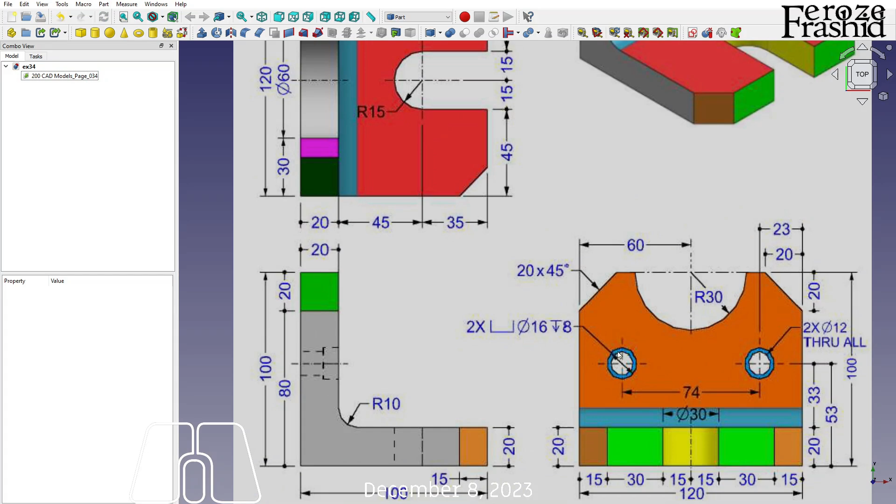Exercise 34 is a comparatively easier problem. The only trick I see is that these two holes are counter bore, and that's the only trick. Other than that, it looks like a pretty straightforward job. So I'm going to relocate it to its position, one of the corners, and then we'll get started.

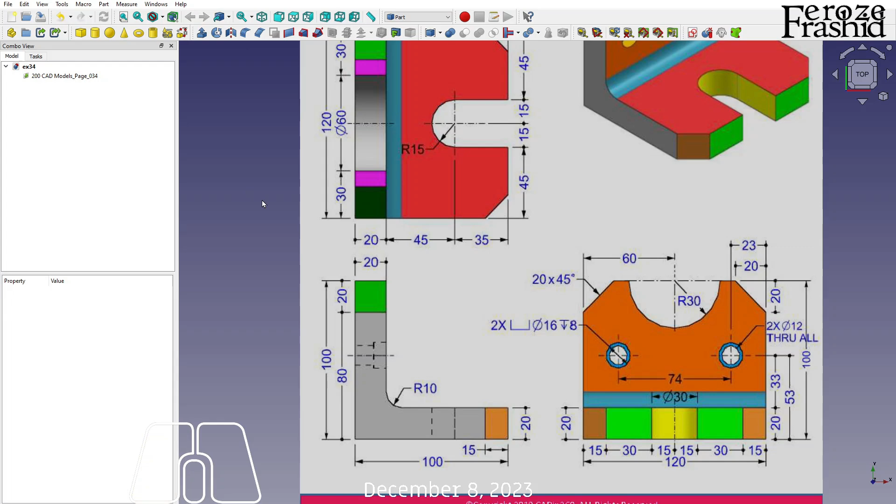That's about it. I want to start with the front section, front view, which would be on XZ plane. The XZ, to my mind, is always the front view. So let me go ahead and place this on XZ plane and start sketching there. The image was on XZ plane, we started sketching on XZ plane, so it showed up here.

Now I want to draw the outline, including the fillet here. That way I'm not worried. Okay, here's the trick: I'm using the polyline, and as soon as I finish drawing an arc, the next line becomes tangential, which is okay for now. Just remember we'll have to go back and fix that. If it wasn't a polyline, it would be horizontal anyway, so let's fix that before we forget it.

Now this is 10 radius. I'm going to go ahead and place that. These two thicknesses are equal to 20, right? These two are equal to 100.

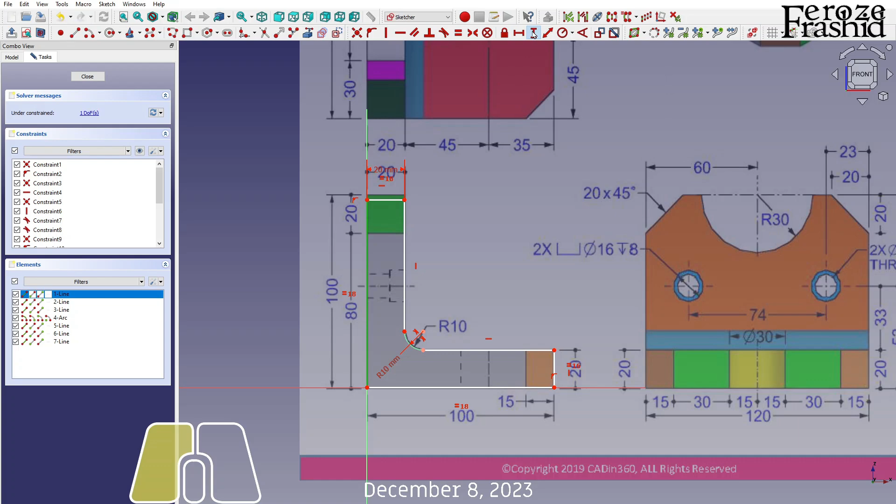Doesn't seem like 100. Did I calibrate? Oh, now hold on, the bottom side is 100, the top side also says 100. I bet the image's aspect ratio was lost when the plane was being built, so we'll take that as okay.

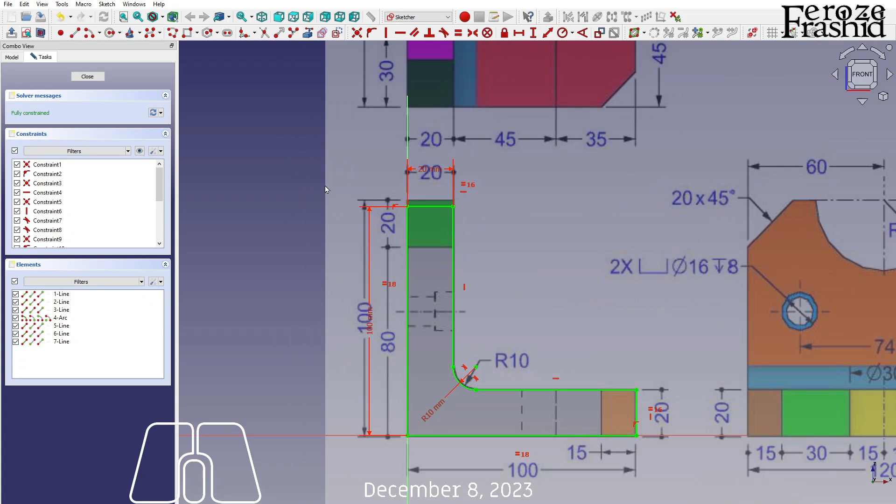Alright, so that's our XZ plane, the sketch is drawn. Let me go ahead and rename that as sketch. I'm going to say angle bracket.

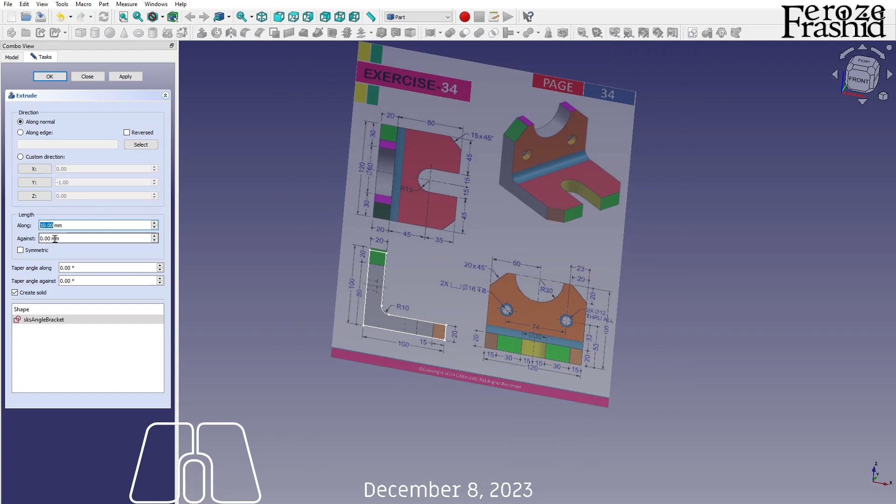Okay, I want to extrude that for 120 millimeters, but I want to keep it symmetric. Now, because I did that symmetric, whenever I'm working on these two empty cutouts, it will be on the XZ plane.

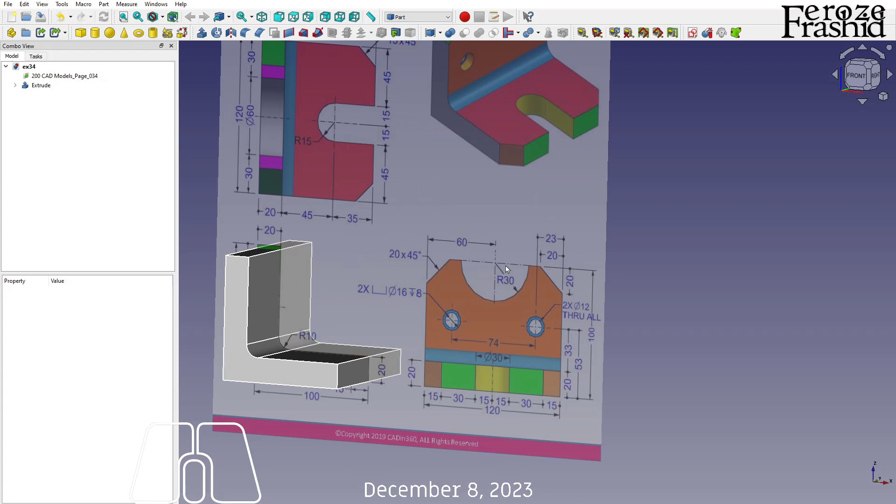Let's start working with those then. The first one, this top one, seems like a half circle of radius 30. So I am going to use a cylinder of radius 30. The height should be more than 20, so I'm going to say 50. And then I want to transform that so it's on the plane there.

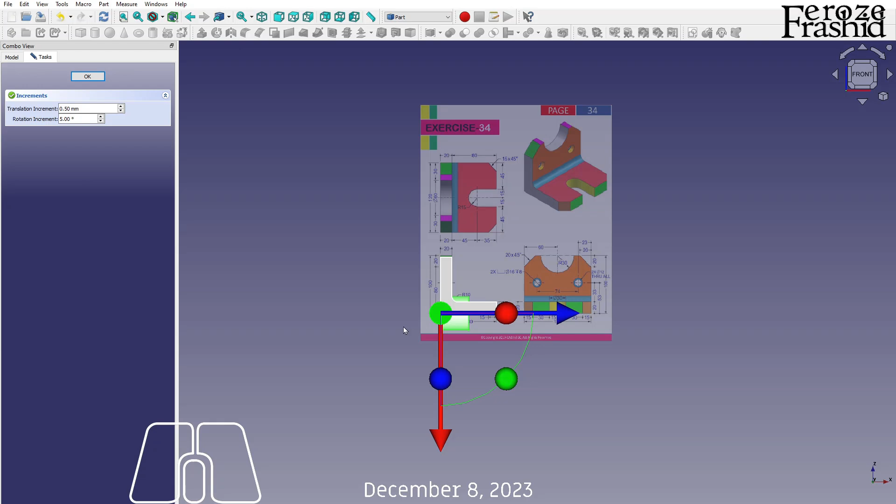I want to pull it up to the height, which is, the center is at 100, so since cylinders move by their centers, I'll have to make that 100 there. So we got that placed. I'm going to go ahead and make that cut. So we got our one wall worked up.

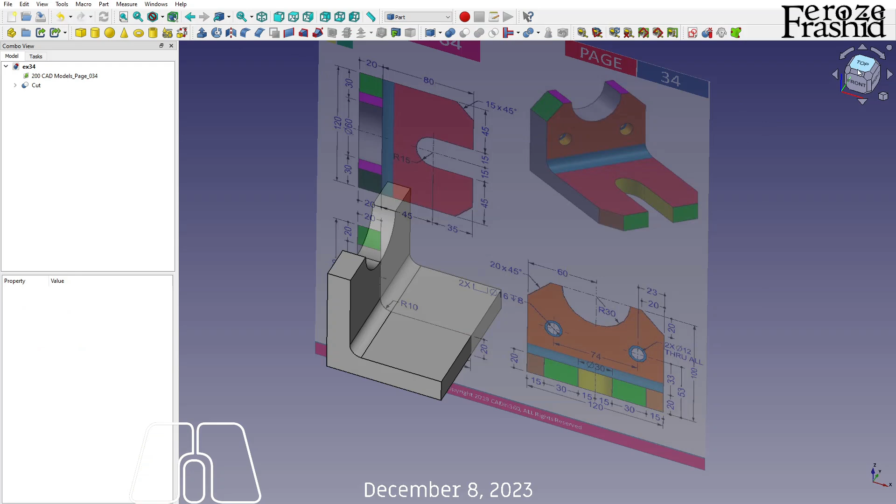Now about this one, I can transform the image, but I guess I don't have to, it's simple. So I'm going to go ahead and draw a sketch on this. Before I do that, let me take some measurements.

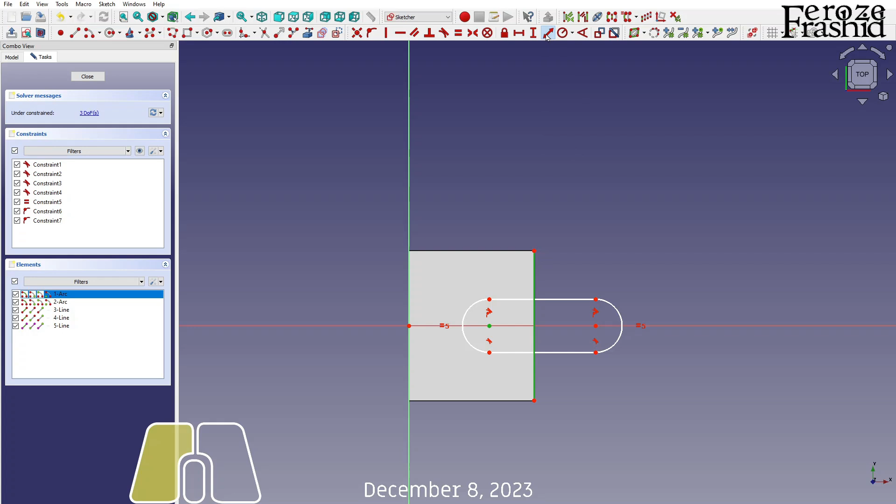So the radius is 15 and the slot is 35 millimeters away from the edge, the center of the slot. So, on XY plane, I am going to turn on, actually before I do that, I'll take this line, then turn on the section cross view. Draw a slot, right? Take this slot all the way outside. The distance between this center and this line is 35.

Okay, we got that. And this is radius 15, if I remember correctly. Now this length, it's fine as long as it's outside the main object, so let's go ahead with 50. Alright, and this is the slot.

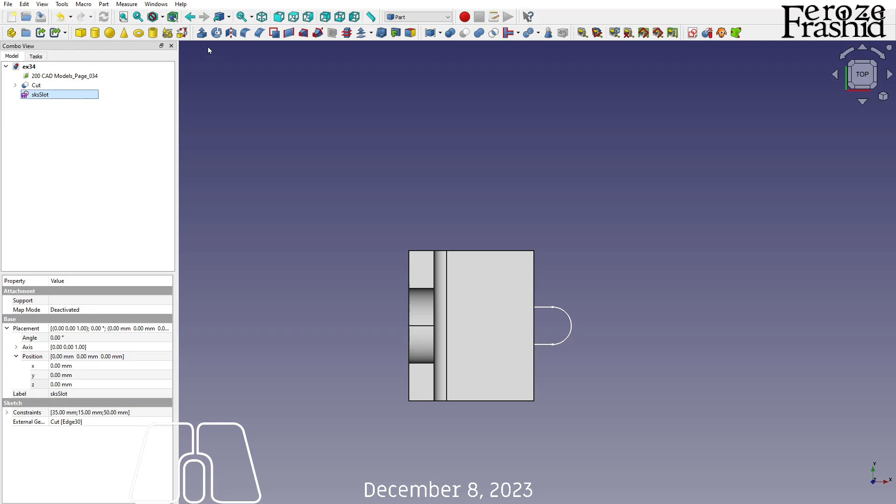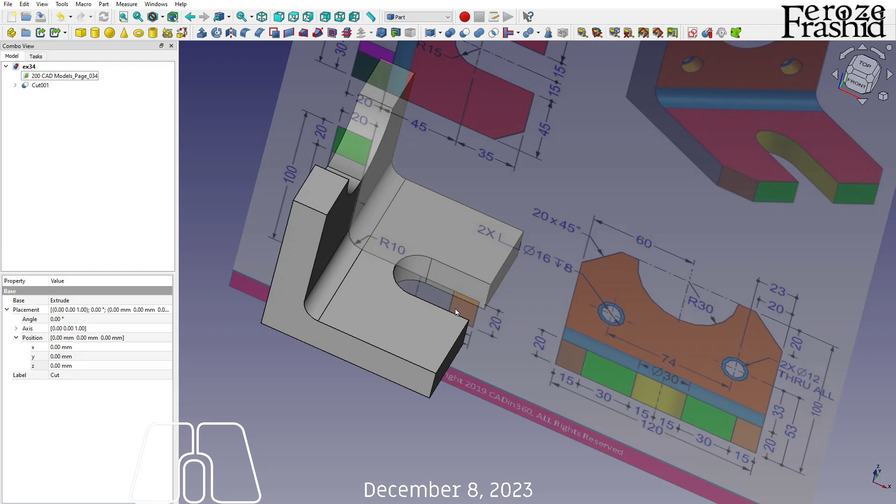Sketch slot. Let's pull that up by say 35. Doesn't matter as long as it's more than 20. Alright, so we got that. Now let me make a cut. So this is the previous cut, we want to keep that. We want to delete this slot. I can make it easy for myself and select slot and make a cut. There, we are almost there.

The next job is to make these two holes which are counterbore from this face. This face is 20 millimeter away from the origin, from YZ. So this is the YZ plane, 20 millimeter away. So we want to follow the best practice, and on YZ plane make an offset of about 20, and then draw two holes.

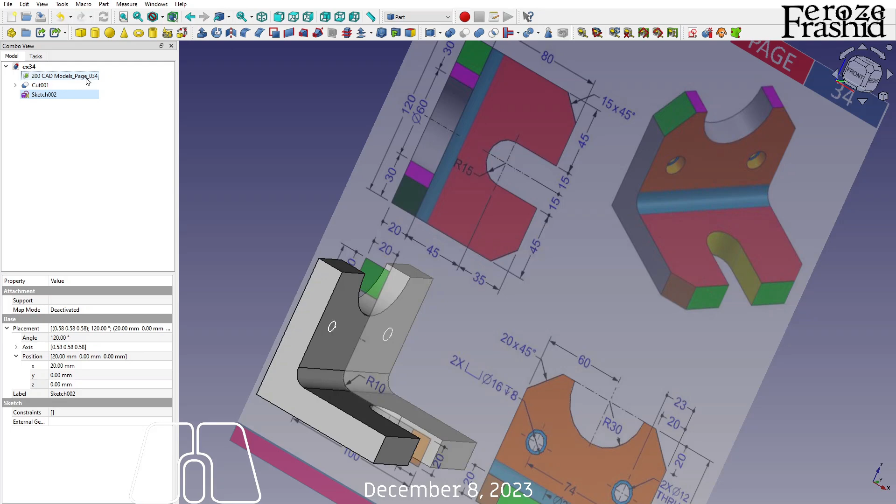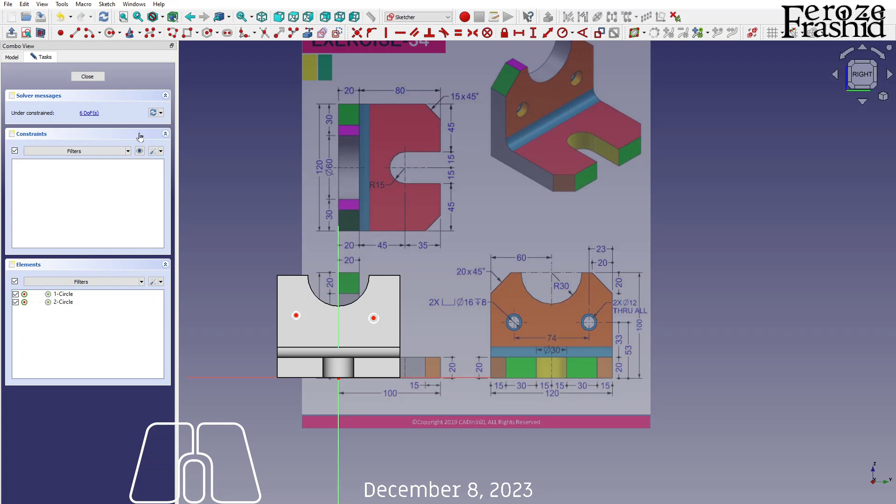Okay, so here is one hole, and there is another hole, and I'll have to go back. Actually, let me place that on YZ plane, so that way... see there. So this is 74 from each other. So this is the sketch hole. Alright, and this is, they are 74 millimeter apart. Okay, and they are symmetric about this axis.

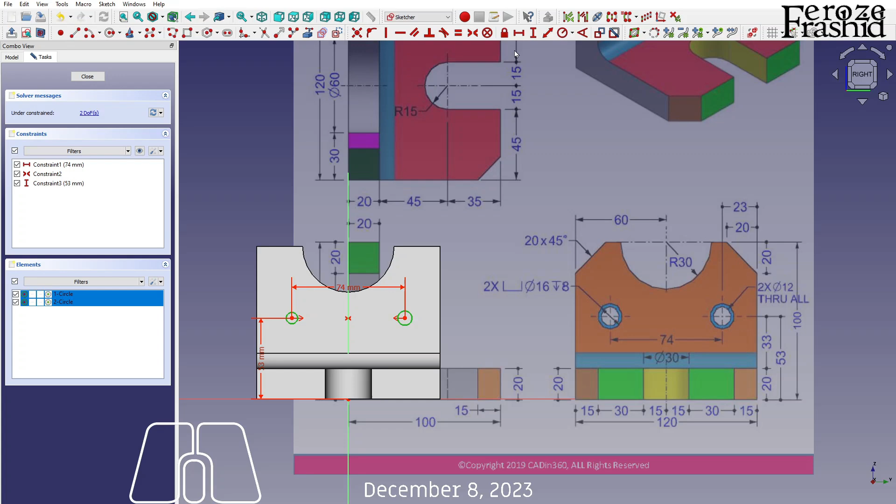I'm not bothering with realigning with this tech draw because it is not accurate. And the height from the center is 53. Alright, we got that. And the radius is 6, the inside radius that will go through, so which is 6. Cool.

Well, what I can do, actually, I can deal this counter bore hole better from PartDesign. So let me go to PartDesign, and maybe create a body. Cool. I am going to pull this one into the body, also the sketch, because PartDesign cannot work outside a body. Alright, now this sketch, this is the whole sketch.

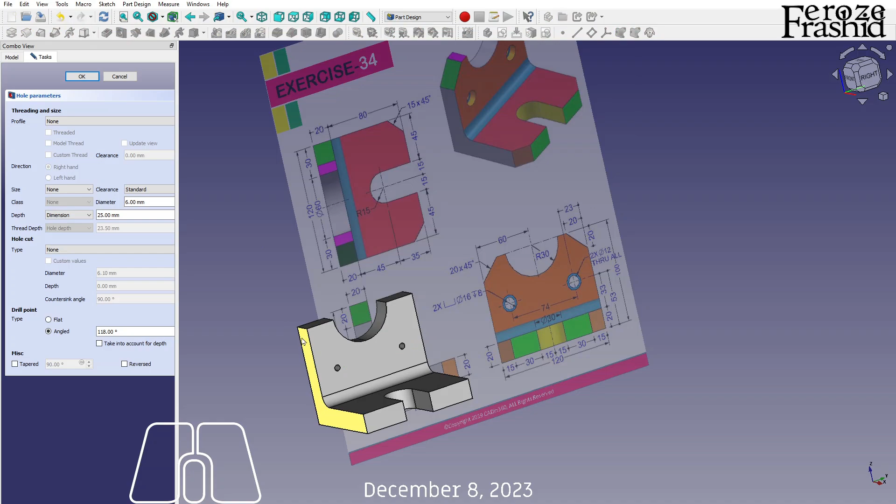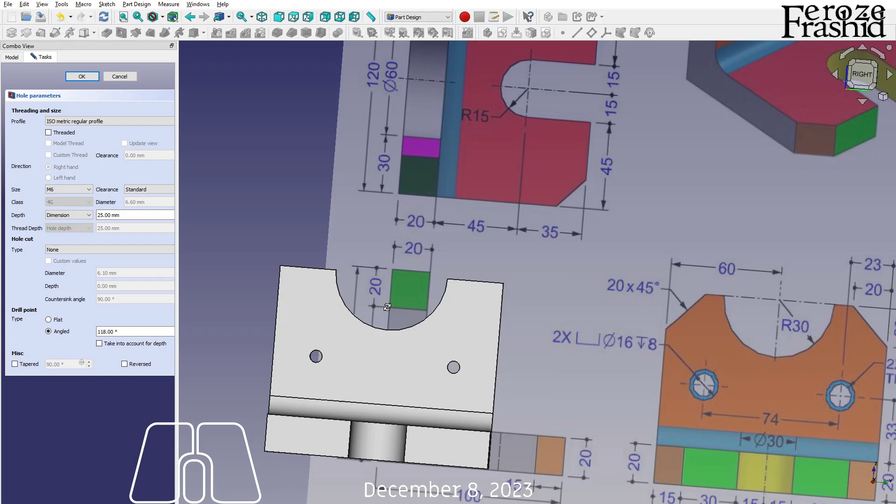What I am going to do, I am going to select this sketch and click on this hole tab, and that creates a hole on that sketch by default. So when it does that, it's not actually taking the radius that we've specified in the sketch, it's just making a hole. Now the radius, I'll have to fix it from here. So 6 millimeter, I'm gonna go with M6. This seems a little smaller than 6. Okay, we'll fix it later.

And depth, through all. And then type, I'm gonna say counter bore. And the counter bore is 16 millimeter diameter, 8 millimeter down. So the diameter is 16. It will go down by 8, right? And I think that's it.

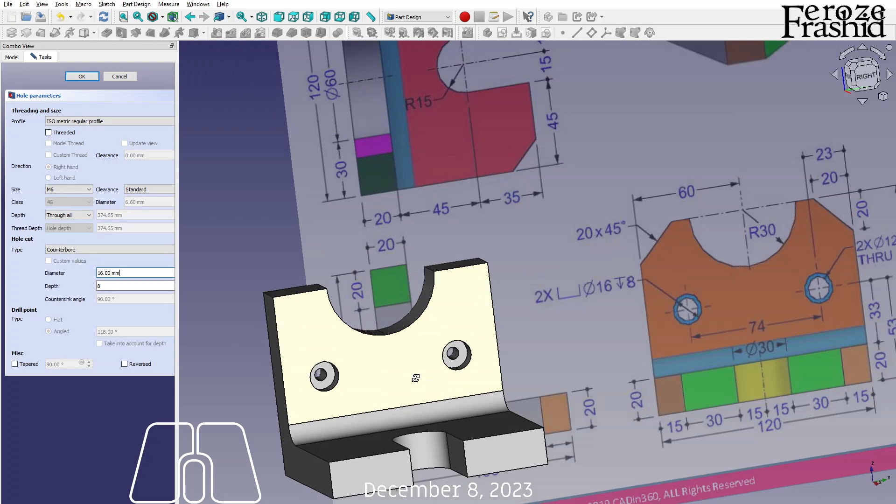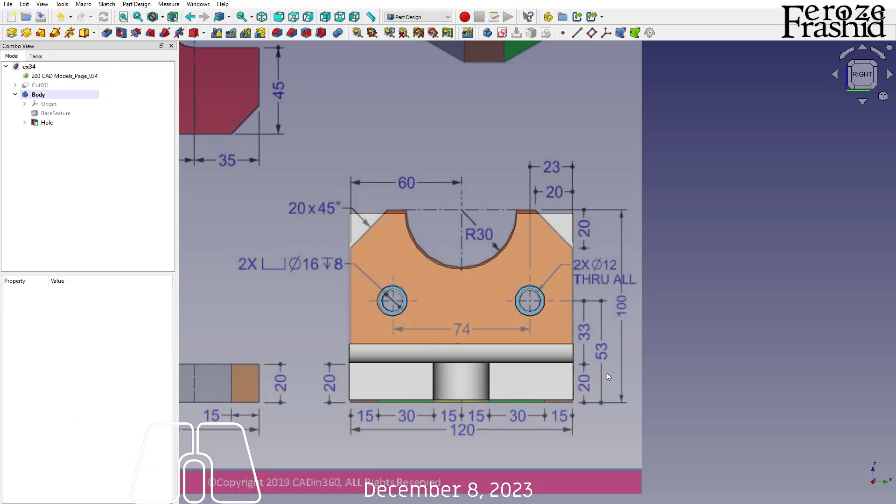The hole seems a little smaller than what it is. So do we have to say M12? I don't know. I'm going to say M6... seems a little smaller than what we have there. So let me see if making it larger makes any good. M10. Yeah, that's more like it. Alright, so almost there.

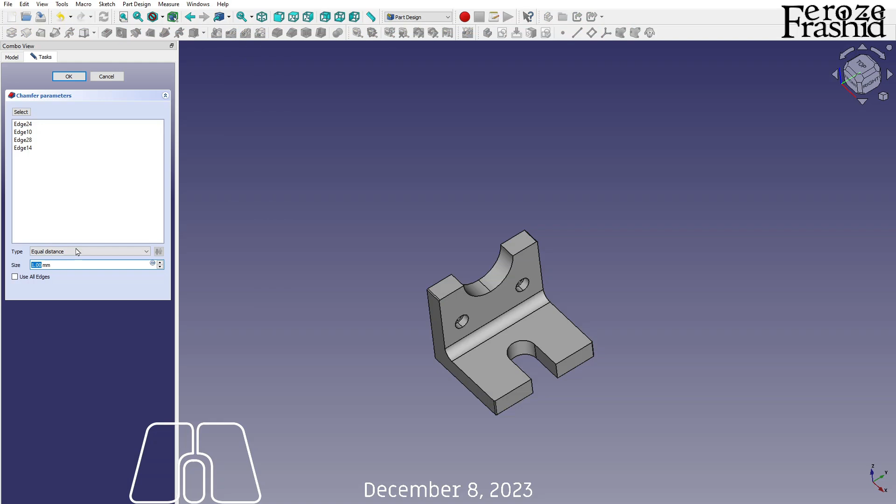We kind of, now the last step is to do this fillet chamfer thing. So I am going to select these 4 edges, right? These 4 edges, and I believe it was 20, so chamfer for 20 millimeter. Cool. That's our object. Yes, that is our object.

Pretty simple. Well, it is good that there was some interchangeability between part and part design. So we started with part and we finished up in part design. Whatever works better, we should go for that one.